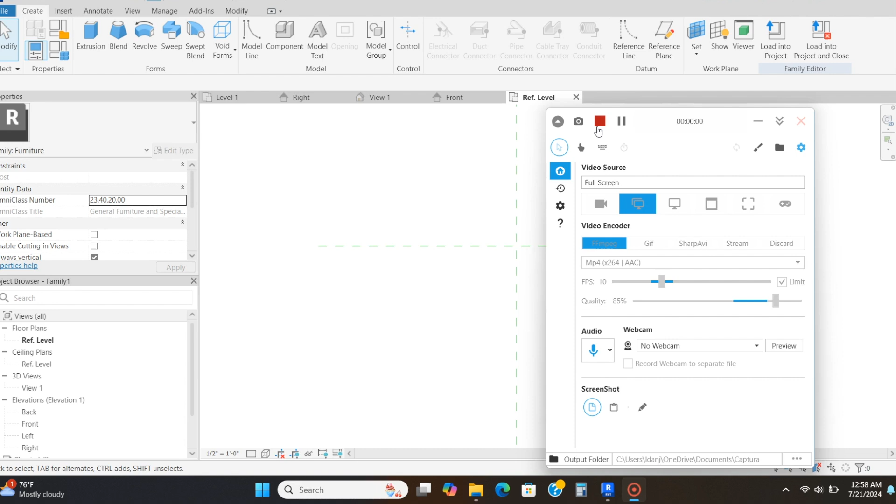This is how you're going to make a nightstand.

Here on the reference level, go to extrusion and click the square or rectangle tool. Just make any type of square or rectangle. Obviously, if you're modeling after a certain nightstand, enter those dimensions, but for right now, I'm going to enter random dimensions.

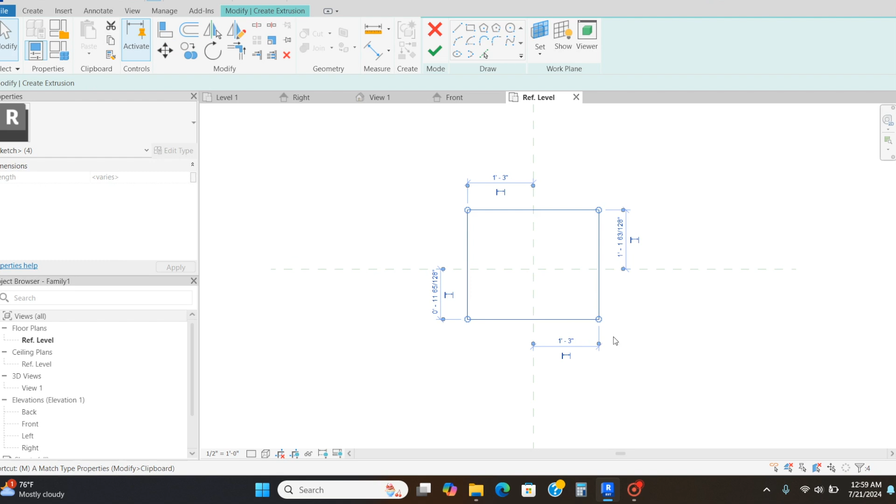So I'm going to do 25 by 30. I'll select that whole thing, press M-V on my keyboard, or just press the move icon, and center those on the reference lines. This line right here needs to align with this line here.

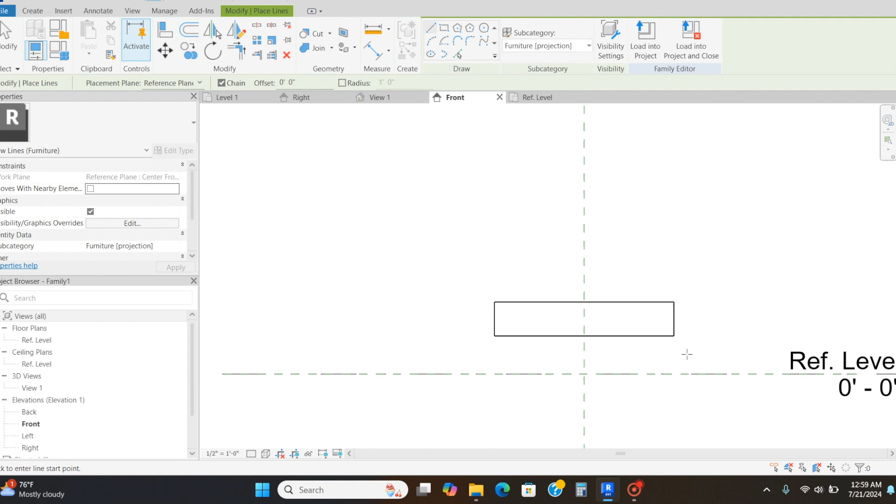Now I'm going to go to the check mark, go to the front view, zoom all the way in, and press L-I on my keyboard so I can draw a guideline for how tall I want this nightstand.

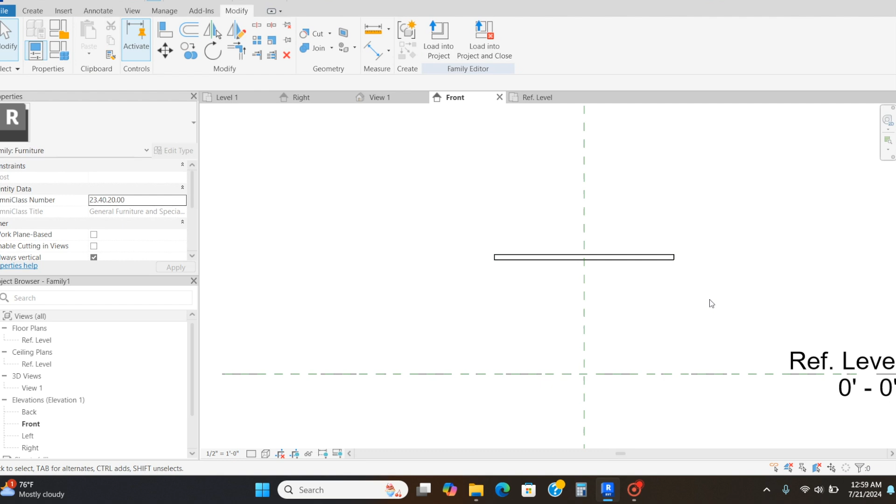I'm going to make it 20 inches tall, and connect this to the top of that, but leave some thickness for the top of the nightstand. Then I'll delete that, and go back to the reference level.

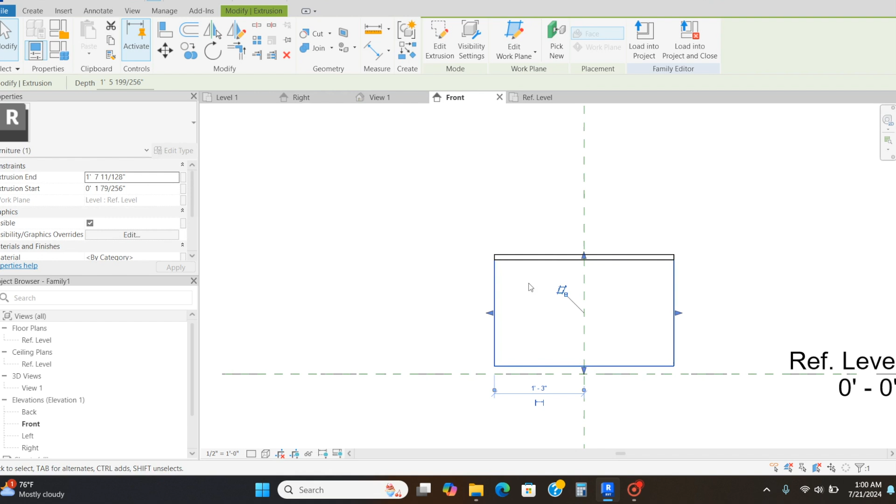Go to create extrusion, make another square the same - technically this is a rectangle - and push it in just a little bit so I can have a bit of overhang. If you need specific dimensions, go back to the reference level, click edit extrusion, and make these the same length on all sides.

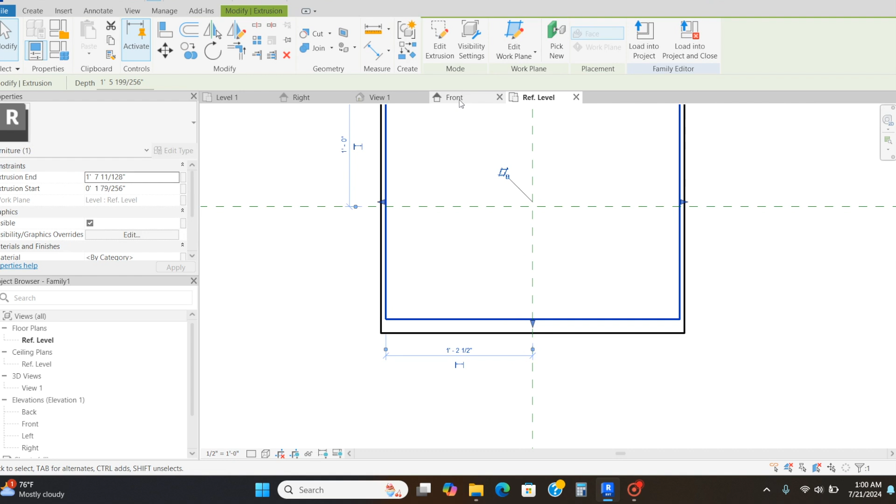But I am going to pull this in some. Now I pulled this in a little bit further because I need room not only for overhang at the front, but also for the thickness of the drawer front. Unless it's going to be flush with the actual base of the nightstand, you might not need to make that much room, but I'm not going to make this one flush.

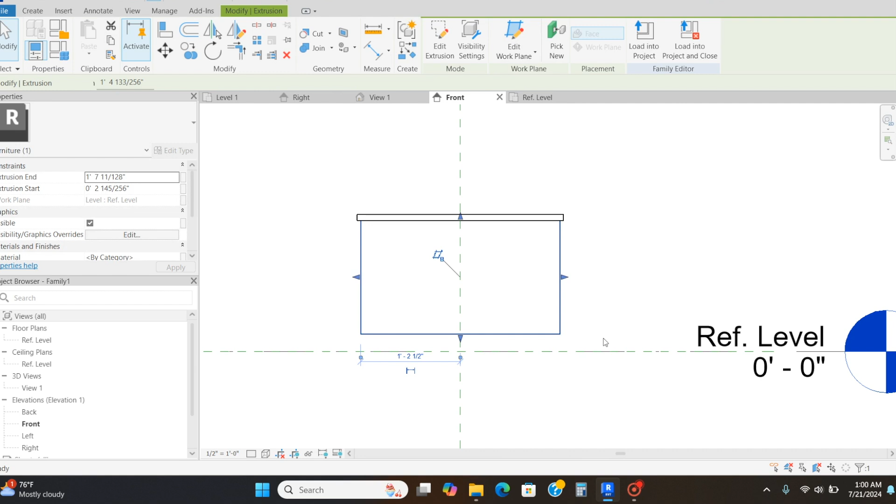So now I'm going to go to the front and pull this up a bit. I'm going to press L-I and do about 3 inches, then press A-L on my keyboard so I can align this with the top of this line.

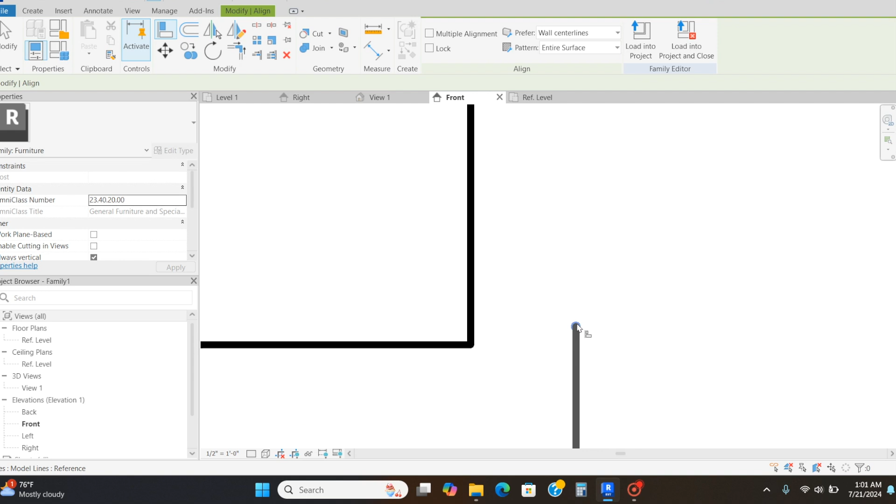As I'm highlighting the line, it's not necessarily getting the top, it's just getting the entire line. So I press tab, and a blue circle highlights, which I click. Now I click the bottom of the line, the bottom of the nightstand base, and delete this dotted line.

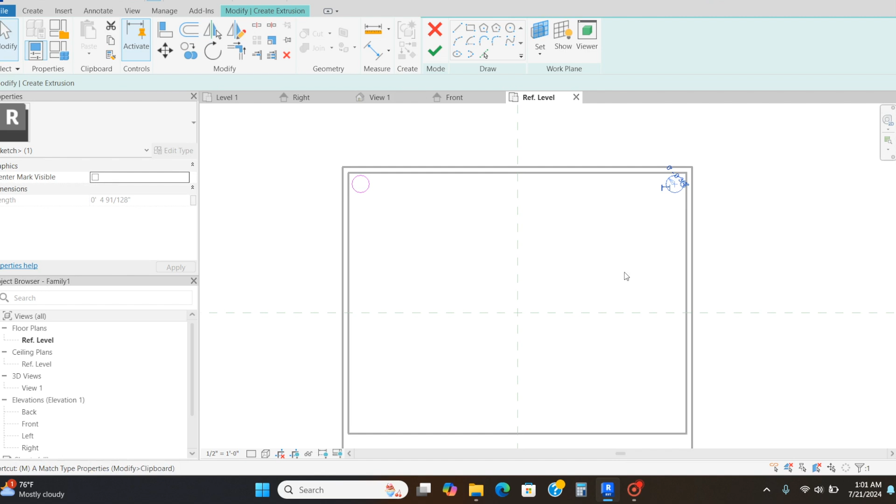I'm going to go back to reference level and create circular legs, but you can do square legs, whatever you want. I'll select that, press M-M on my keyboard, or select the mirror icon, and mirror this over on all sides. But I'm actually going to move this back a little bit.

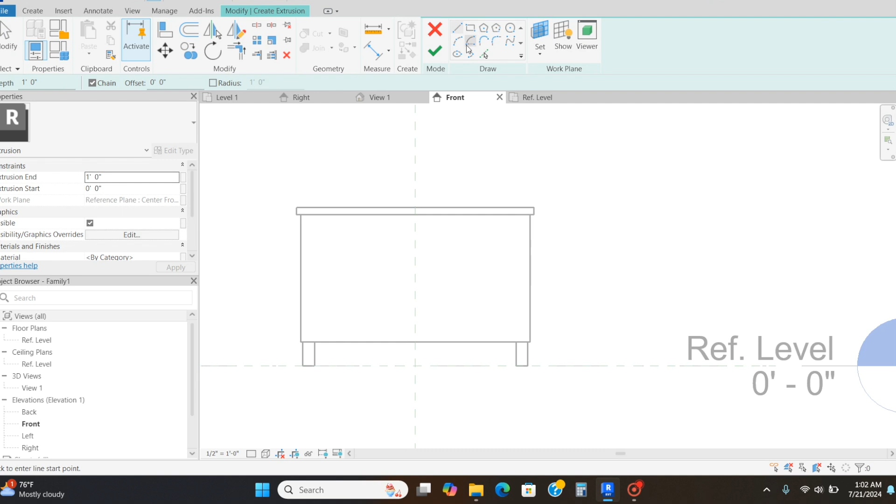Now I'm going to select the check mark, go to front, and create extrusion. I'm in the front view, go to the square tool again, and create these long drawers.

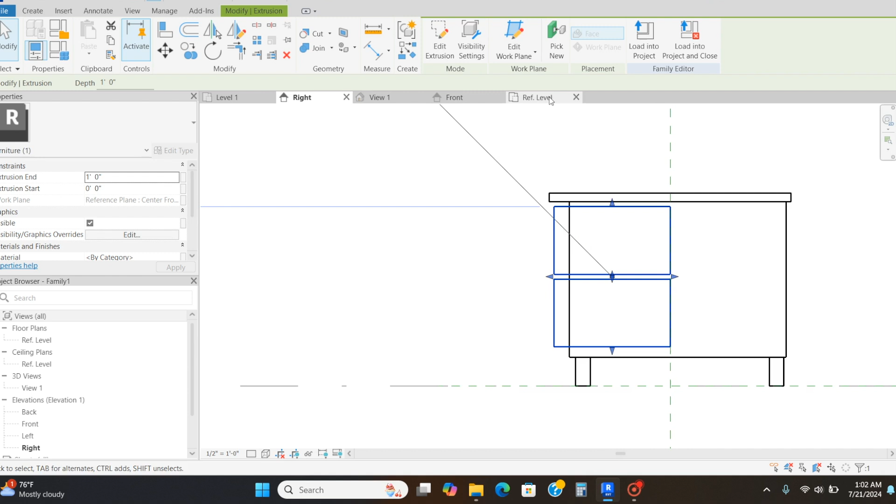I'm going to select this, press C-O on my keyboard to copy it down, just like that. Select the check mark, and you can either go to the right for this one, or go to the reference level. I'm going to go to the right and just drag this.

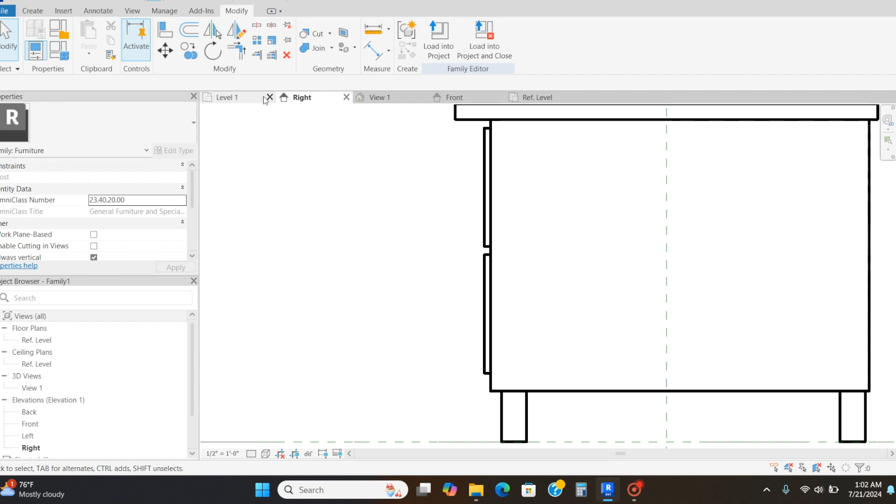Right now you're looking at the side of the nightstand. I'm going to drag this and make the thickness of the drawer fronts approximately accurate. Now I'm going to go to the side - no, I'm going to go to the front actually.

Now I'm going to do the handles, the hardware. So I'm going to go to create, extrusion.

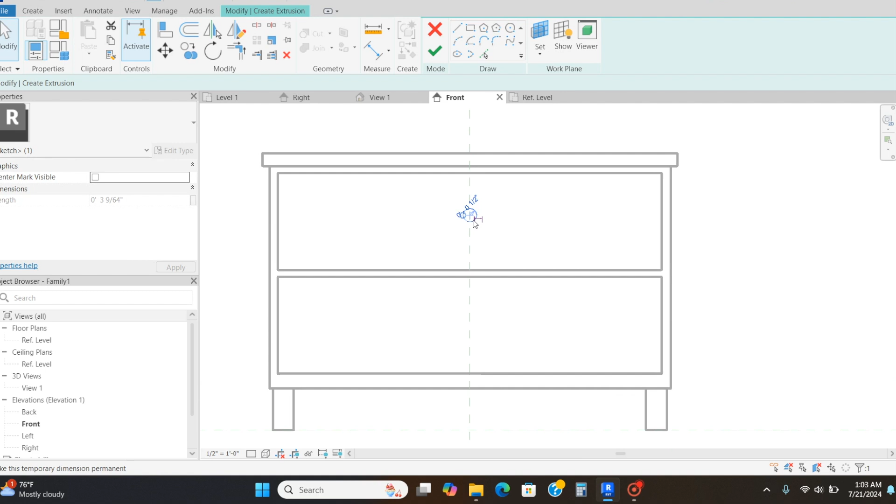I'm going to go to the circular one. Since I have circular legs, I'm just going to do circular hardware, and I'm just going to do half inch. Select it, copy it down. And I'm going to go to the right, but once again you can go to the reference level as well. Guess I'll go to the reference level this time. Pull this back some, and then now I'm going to go to the front again.

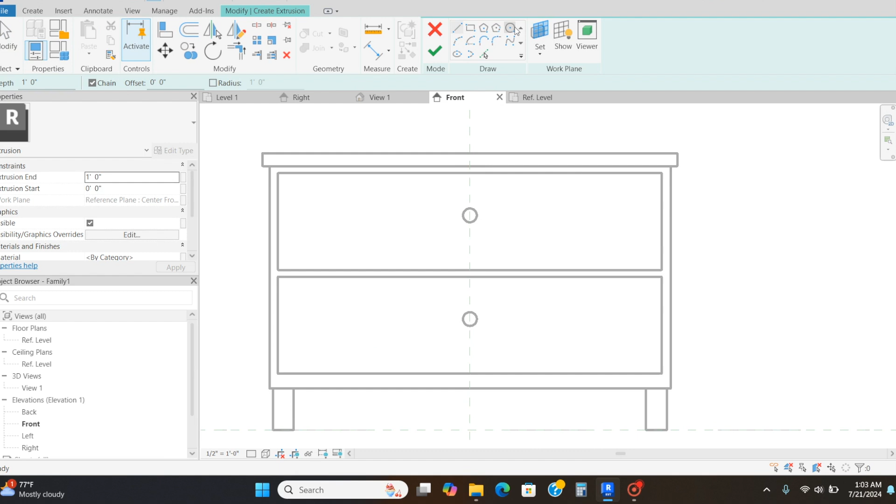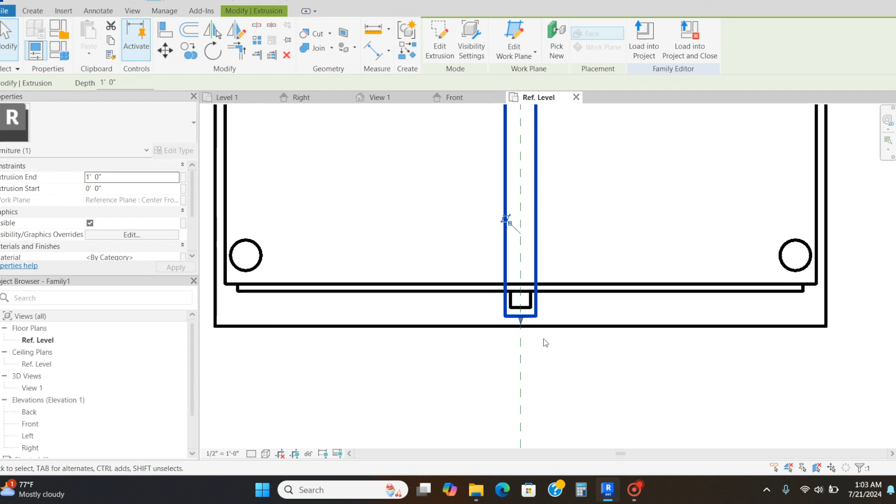Create extrusion circle, and now I'm just going to make this a bit bigger than the half inch. And I'm going to copy this down and over. Once again, you can go to the reference level or the right side. And I'm just going to drag that up and back.

As you can see, make sure to change it to hidden line so you're not seeing through everything. And as you can see, this is the final result of how you make a cute and simple nightstand. This is version 1, and now I'm going to move on to a different version of a nightstand.

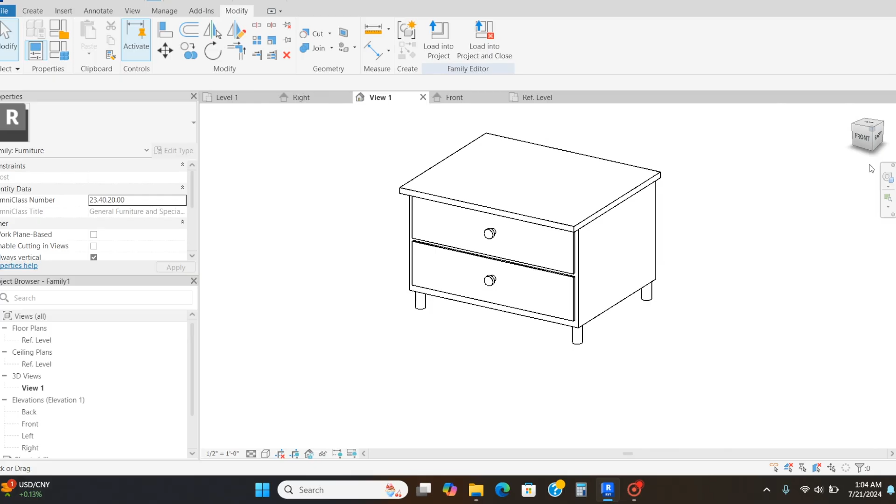The second type of nightstand I'm going to show you how to make is more of a decorative one, and it's going to feature some raised panel and some beveled edge design detail. It's really simple.

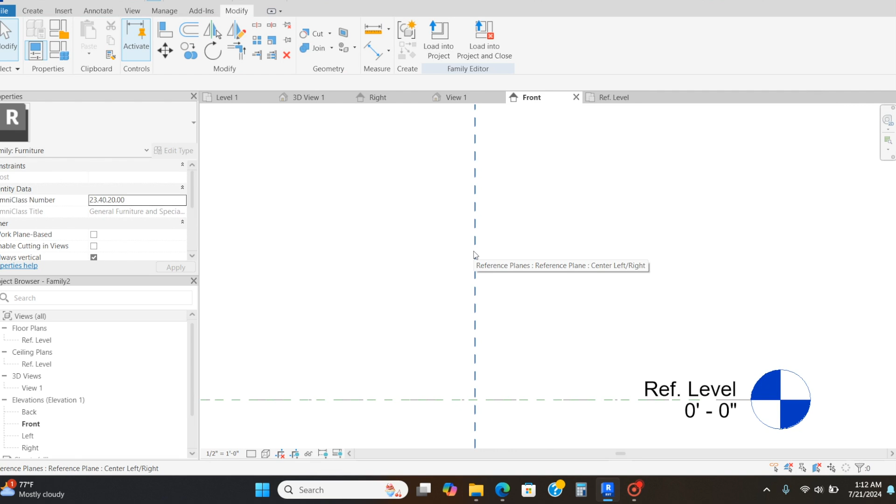So in the front view, I'm going to draw a few guidelines. You can add reference lines. I find that a bit extra, but it's whatever you feel is comfortable with you and your work.

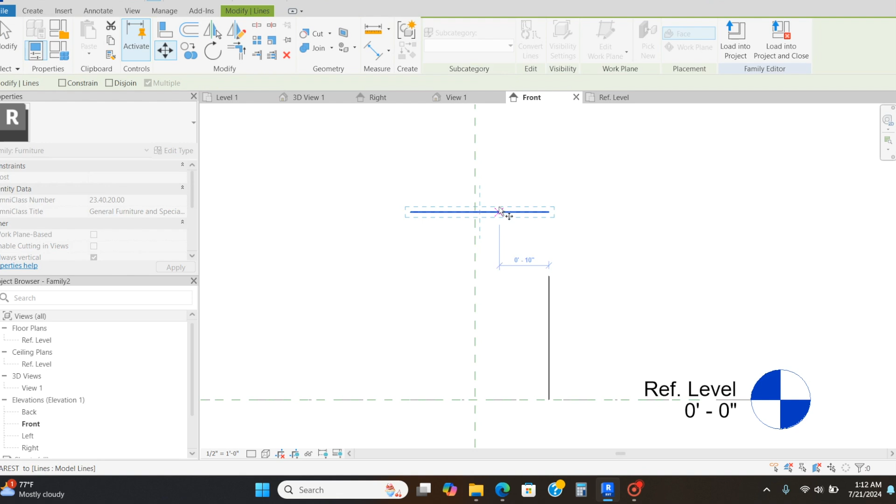So the height is going to be 25 inches. And then I'm going to draw a 28 inch line because the nightstand is going to be 28 by 28. So I'm going to move this 28 inch line to the center, and that's going to cover my height and my width.

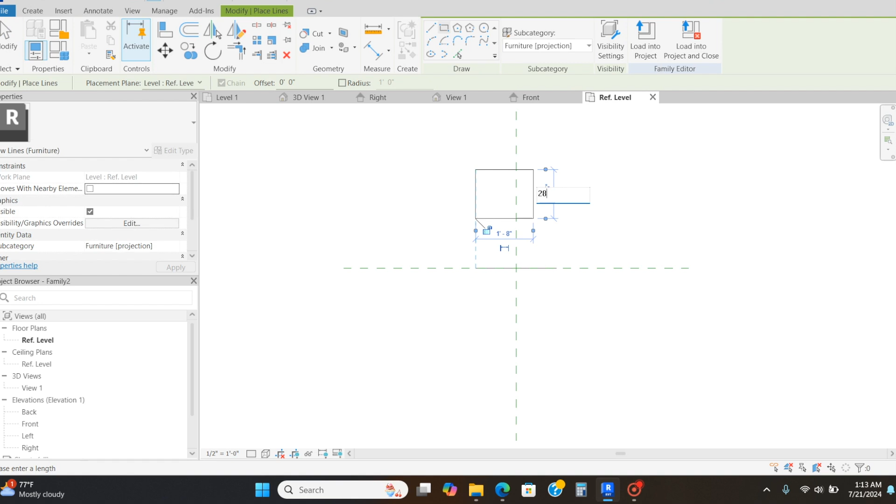And now I'm going to go to the reference level, and I'm going to do model line, which is a detail line, that's what I consider it to be. And I'm going to draw a 28 by 28 inch square, and this is going to cover my width and my depth. And I'm going to put that on the center of these reference lines.

It looks like this one, I may be a little extra, but it looks like it's already on the center. Okay, so now I'm going to go back to the front view, and you can move this line down to the height if you want.

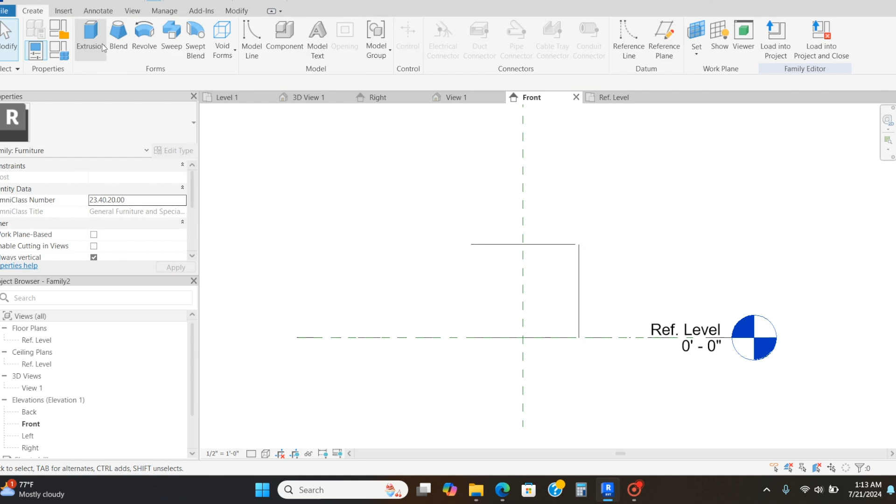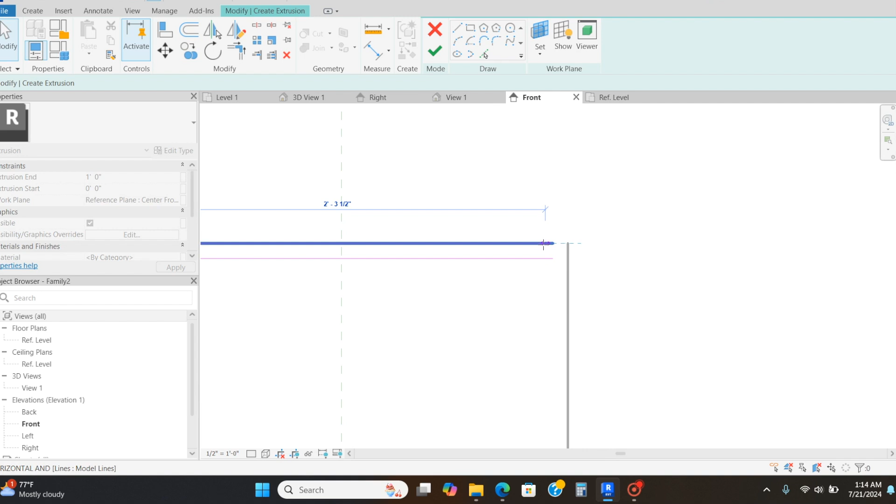So I'm going to create extrusion, and now I'm just going to draw a random line here. Well, it's not random, but then now I'm going to copy this line at a random distance from the other one. And then I'm going to actually make this line a bit shorter.

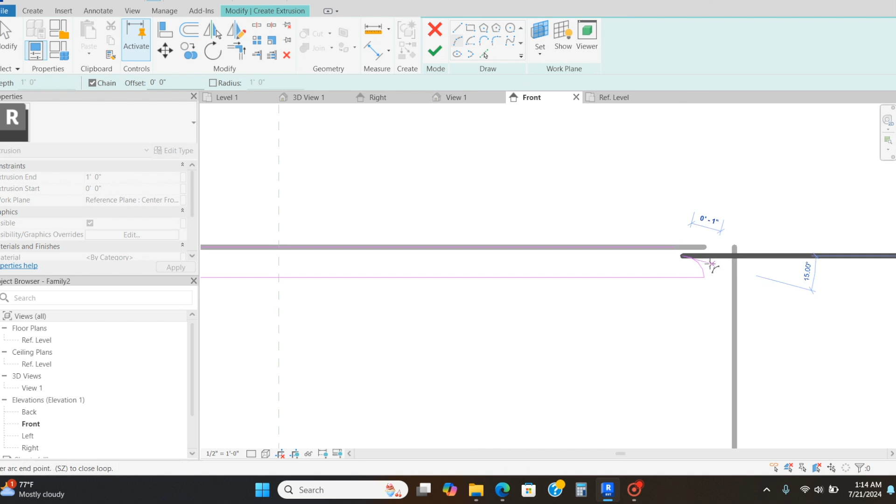And I'm going to go to this Start-End-Radius Arc tool, and I'm going to angle this at a random angle. And then I'm going to connect the last one to the top of this line.

And then I'm going to mirror that. Select it, press MM on my keyboard to mirror. And that is it for the, I don't want to call it a countertop, tabletop, whatever.

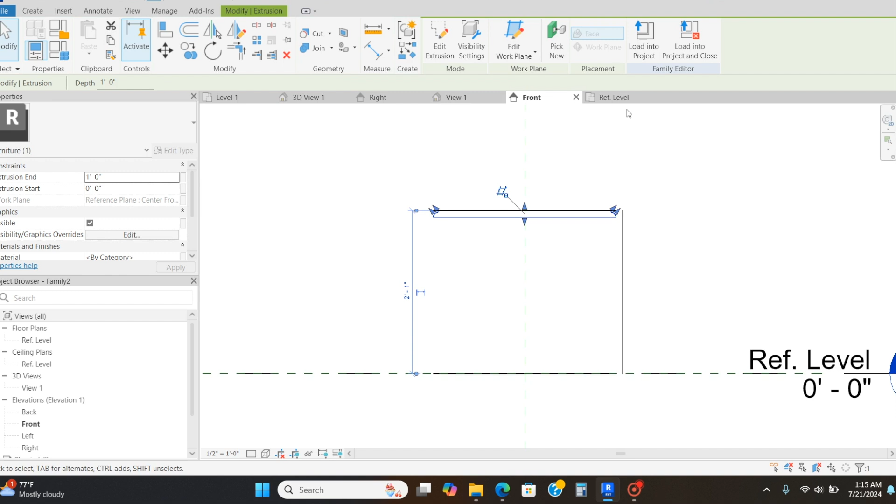I'm going to press the check mark and go to the reference level and bring this all the way back to where I made the square. And I'm going to delete the square.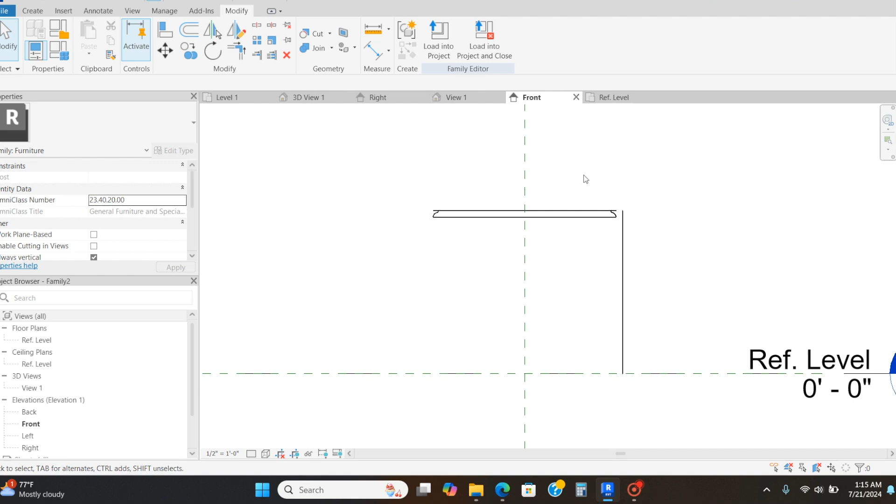So just select all the lines, press tab if it's not selecting the first time. And now I'm going to delete these lines here. So this is what it looks like, and as you can see, it has that beveled curve to it, making it more detailed and traditional looking.

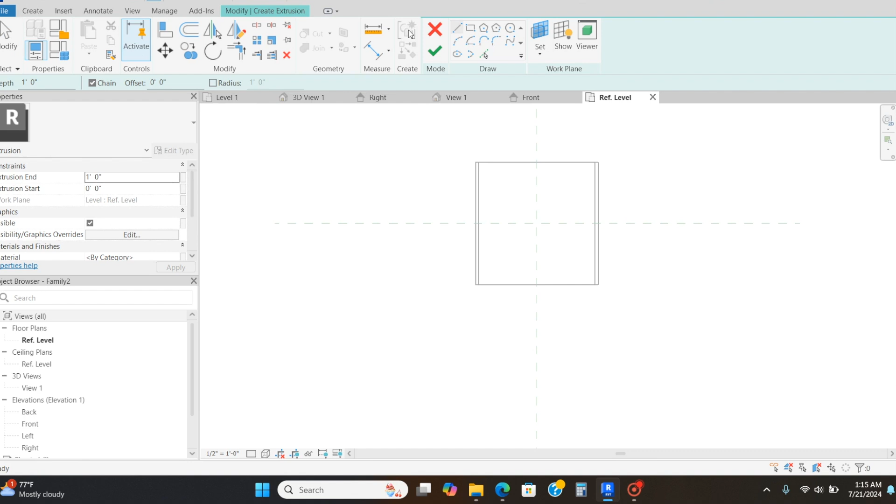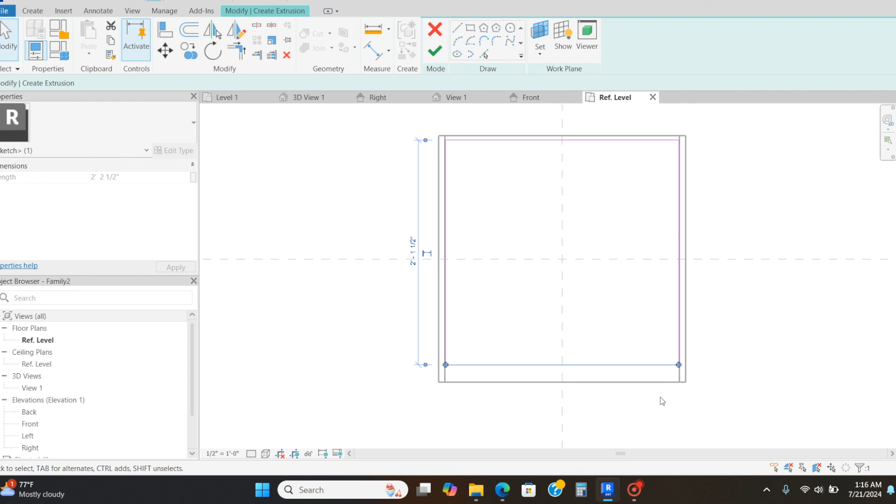So now I'm going to draw the base, the body of the nightstand. Go to create extrusion, the square/rectangle tool, and then I'm going to draw that full, and I'm going to bring it in just a little bit to account for overhangs. And I'm bringing this one back a bit farther because I am doing a raised panel, so I'm not sure how much space I'm going to need.

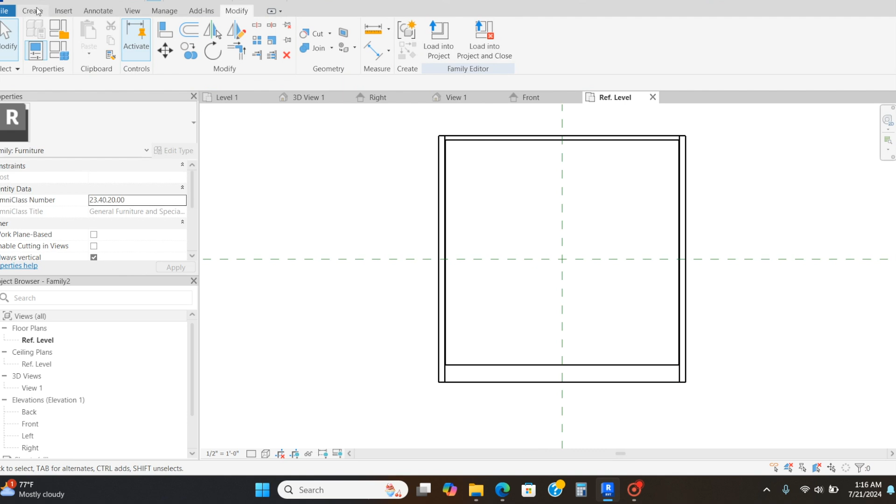Now I'm going to click the check mark, go to front, bring that up. And I always like to account for 3 inches for the toe kick/legs. And going back to the reference level, I'm going to go and do some square legs.

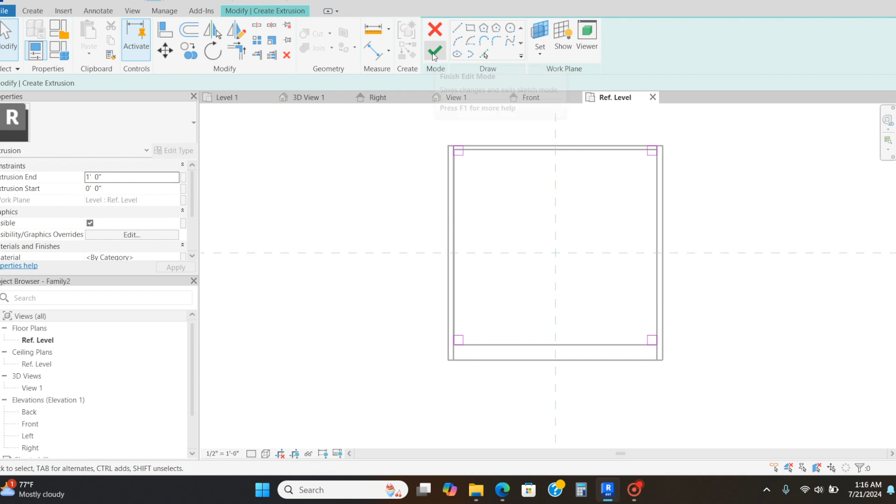So I'm going to select that, MM, and then MM again. I just have to move it up some. And then MM over once more. So I'm going to click the check mark, go to front. And those are the legs. So this is what we have right now.

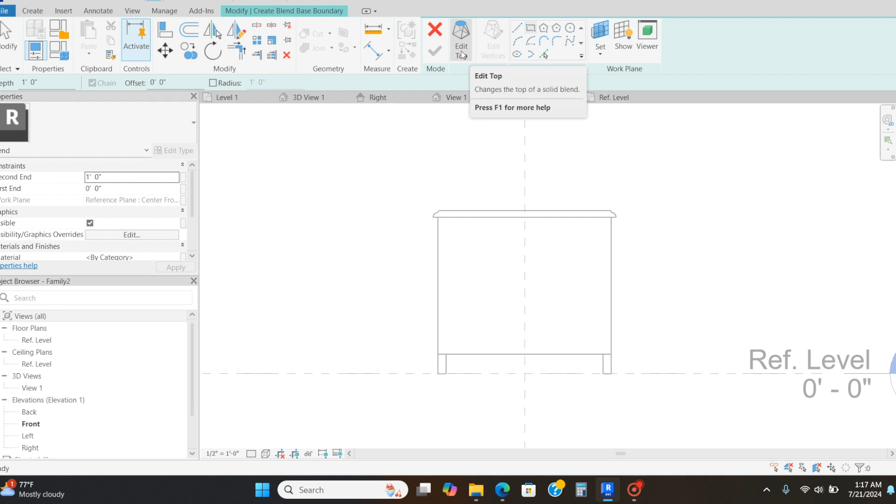And now I'm going to go back to the front view and go to create. I'm going to go to blend. And right now we are editing the base because it's giving you the option to edit the top, but we're editing the base first. So do not click edit top until you're ready to edit the top. So now I'm going to draw a random size square. Now I'm going to edit the top. And I'm going to do that again, but I'm just going to now bring it in some.

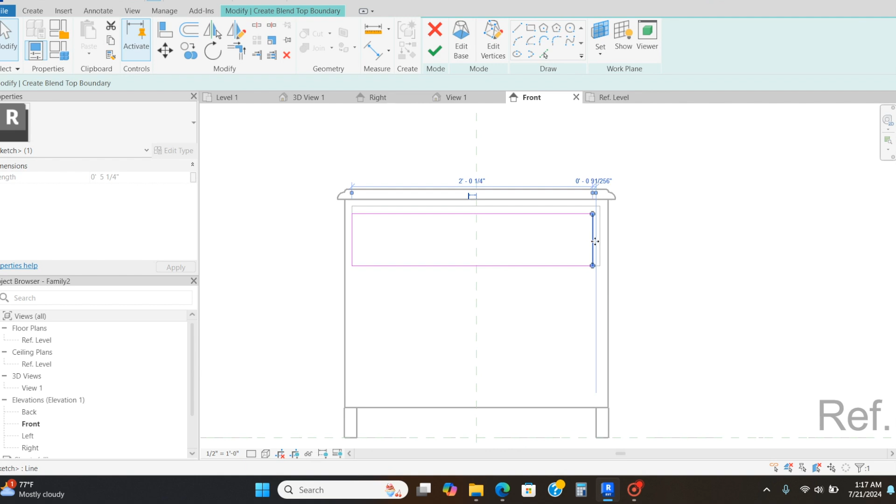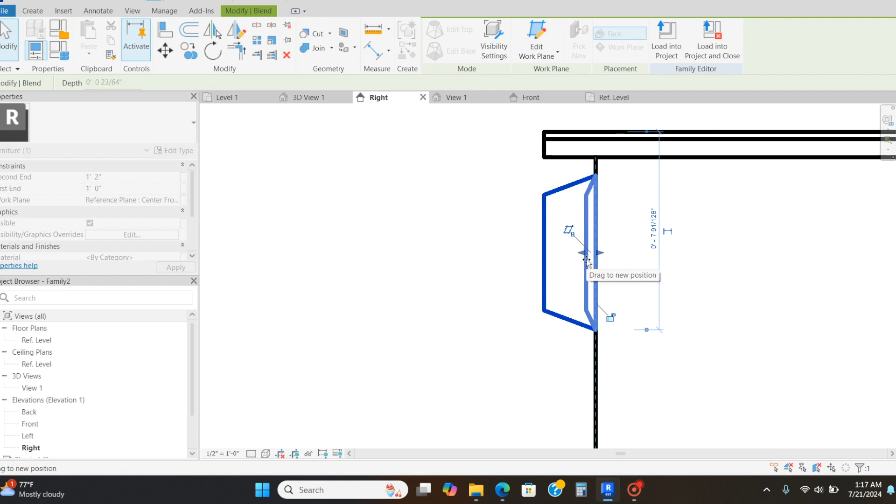And now I'm going to click the check mark, go to the right view. You can do this from the top view, but I find it maybe a bit easier to understand from the right. And as you can see, this is the raised panel. This is usually inside of another. So if you want to draw that, you can. In fact, I'm going to go back and do that. I feel like it looks a bit more normal that way.

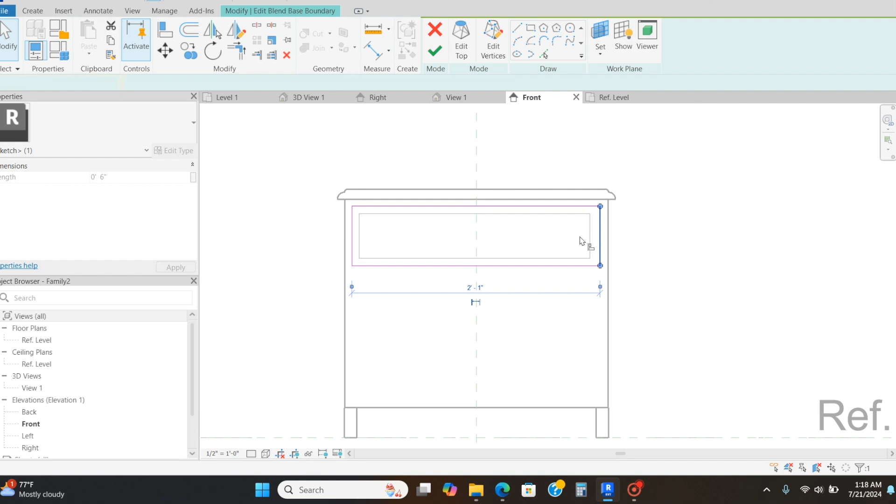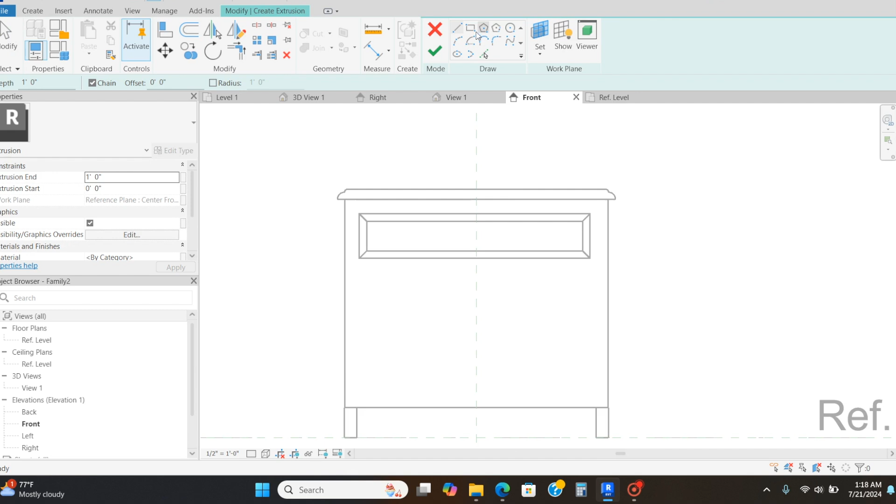So I'm actually going to edit the base first. And then I'm going to move that to where the top is. And now I'm going to edit the top and move that in some. Now I'm going to go to create extrusion, and I'm just going to create a panel on the outside of that.

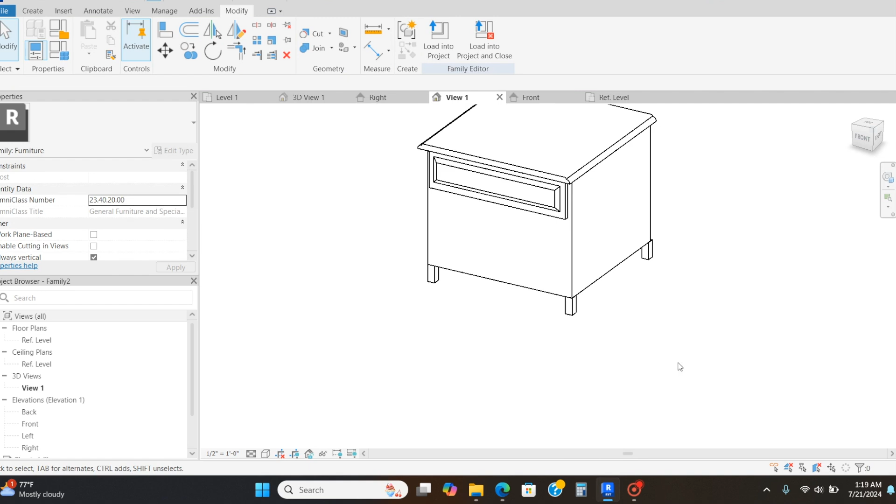Now I'm going to go to the right view and moving the blend up a little bit. And that's how that's looking, and basically just going to try to copy this all over. And as you can see, it was a really quick and easy fix to go back and add that other panel behind it.

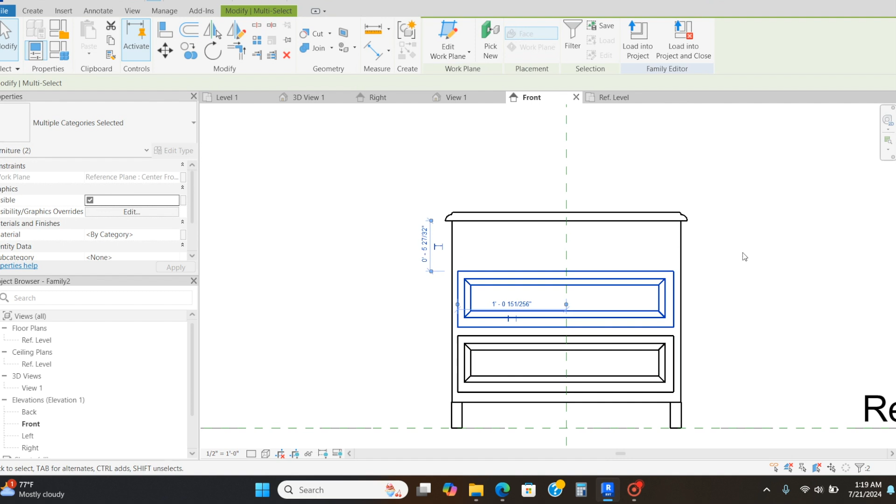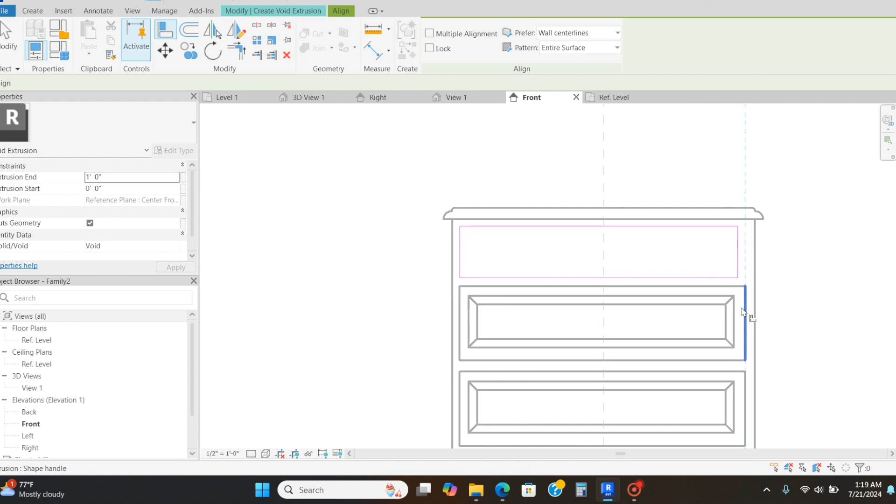And what I'm going to do with this part is I'm going to create a hollow opening for quick and easy grabbing things. So I'm going to go to create, void forms, void extrusions, the rectangle / square tool. And I'm just going to press AL on my keyboard to align this with that. And now I'm going to click the check mark, go to reference level, and you can bring it back as far as you want, to be honest. I guess that's a good stopping point. And as you can see, it's hollow there, and you can see in it.

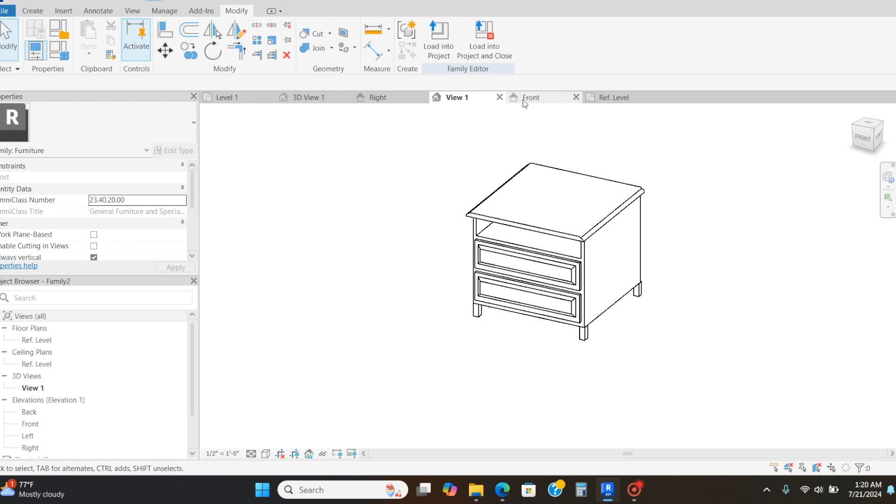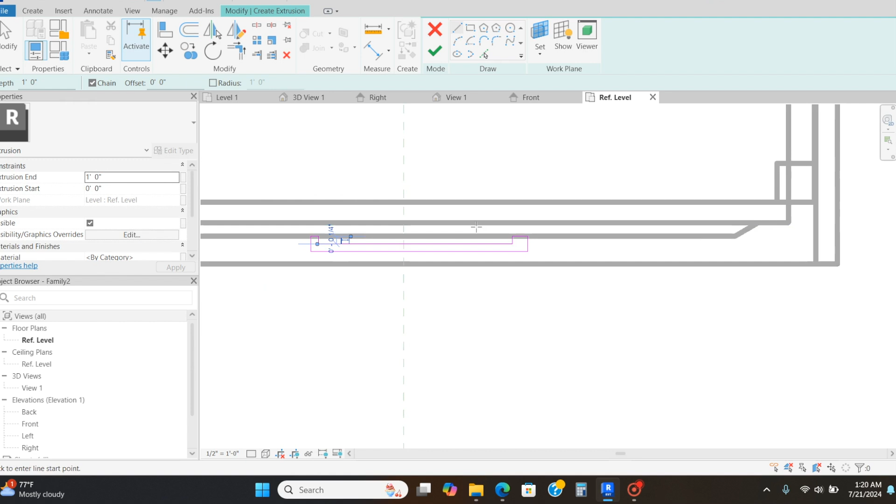So now I need to make the hardware. So I'm actually going to go to the reference level, and I'm going to go to create extrusion, and I'm going to make some hardware. I don't even know what the style of this one's called, but it's more of a pull instead of a knob. I'm not making mine super even because I'm just doing this for demonstration of the video. But if you're following a certain spec, then obviously you want to make that even according to the dimensions. It may be like a 5-inch center to center or whatever.